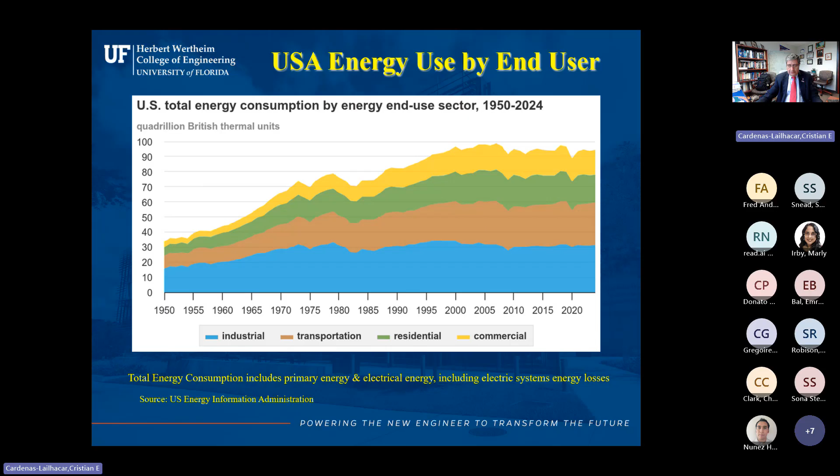So in terms of percentage, in terms of quadrillion British thermal units. So that is in the period from 1950 to 2024. So you see that we're going up. Not much in the industrial, but on the rest, yes, we are. So energy consumption here is considered to be the electrical systems and some process. And all the information I'll show you, or most of it, is from the Energy Information Administration.

So here we have the sources in terms of fuel, sources to generate power. For example, where is it that they go or generate some electricity and power, for example, the transportation. So all the sources of fuel that we have go to the same 4 sectors: transportation, industry, residential and commercial. So in a way, if we group them, they are kind of a 3/3. So the US can be represented as a 3/3, except for the fact that we have a good chunk of energy consumption by the electric power sector. So that is of the essence.

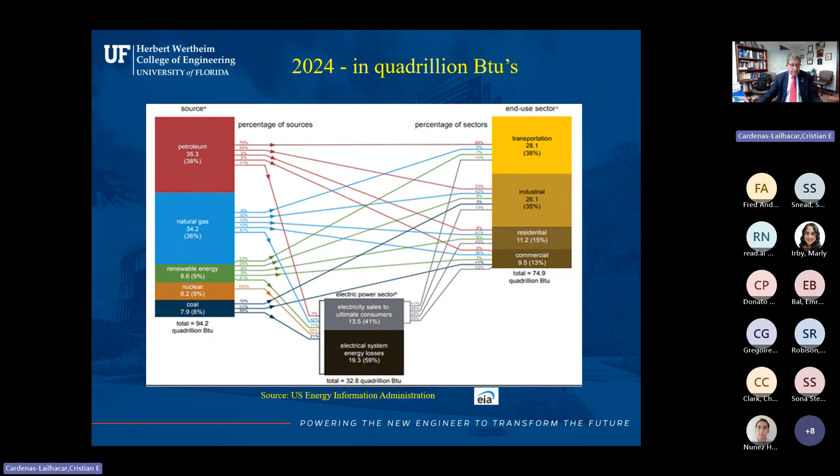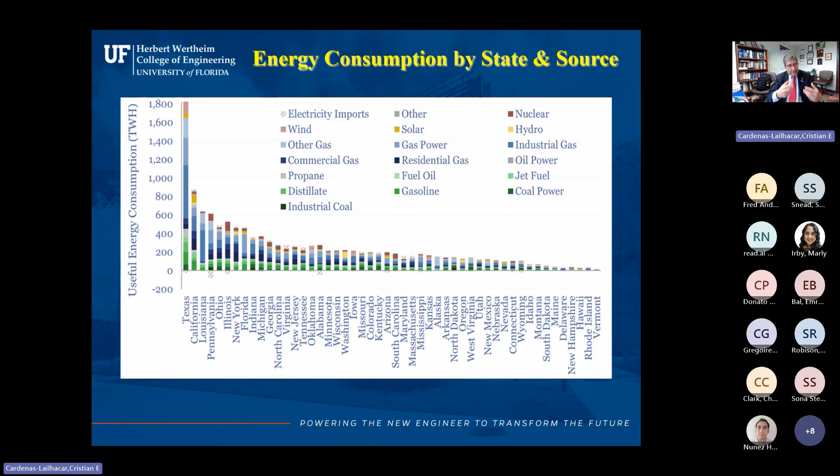Now, how is this distributed around the country? Well, here in this graph, just looking at the states on the horizontal axis, you see that the one that uses the most energy in terawatt hours is the state of Texas. The state of Florida is kind of in the middle down, but we still use a lot of energy. And these sources that are being used are shown on the top. It might be a little bit hard for you to see, but what is the relation between the energy usage and this idea of development? What I mentioned before, energy is in a way a metric for development.

So they are coupled. The goal for OECD countries is that these two are decoupled. Essentially, we should continue growing with a better GDP and keep the energy usage pretty much constant. So do more with less or with the same. And that's the main idea. Now, very nicely said, but there are some issues. For example, you might have some problems if you don't expand your energy consumption.

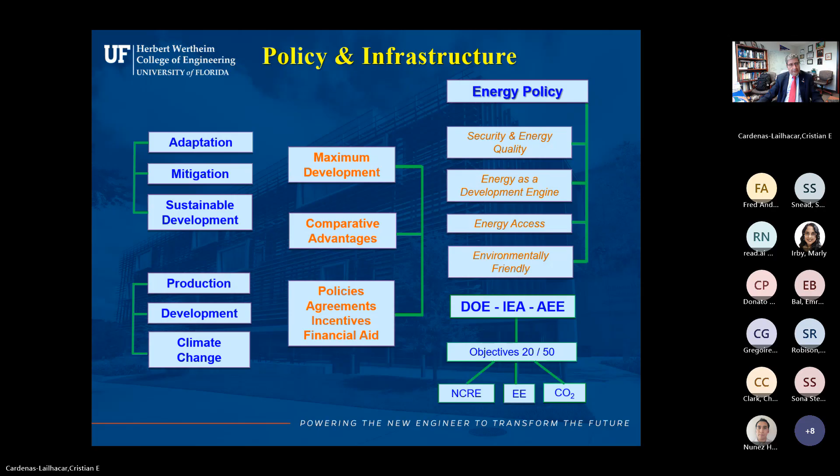Now, what about industry? Well, in industrial energy management, the goal is: if you can do some research and apply it to your company, to your state, to your situation, then if you're going to be generating policy or being responsible for policy, it allows you to be more competitive.

And that's the goal. Competitive, because if you can reduce your production costs—those reductions, which in general are fixed costs, now translated into variable costs—you translate those variable cost reductions to reduce your cost of manufacturing, and then pass those savings to your customers, providing the same goods and the same quality of goods at a lower price.

You are more competitive than those that don't do that, and consequently it's good to increase all that through innovation. In industry, there is no energy regulation. There is in the environment on how much you can emit, EPA knows very well about that, but we don't in industry in terms of energy. So it is important that in industry we consider energy management systems. Why? Because we can save a lot of money, be more competitive, have better trade in the market for your products, provide better services, be more competitive, and increase your sales.

All these under an environmental impact, social responsibility, ISOs allow you to be certified, and if you want to put your products somewhere in the world, Europe, Asia, they will require certifications that are international, like the ISOs. ISO 50001 is the certification for energy management. Then you become more sustainable. So all these are good things that we should be doing and implementing, and they are essentially based on the same ideas.

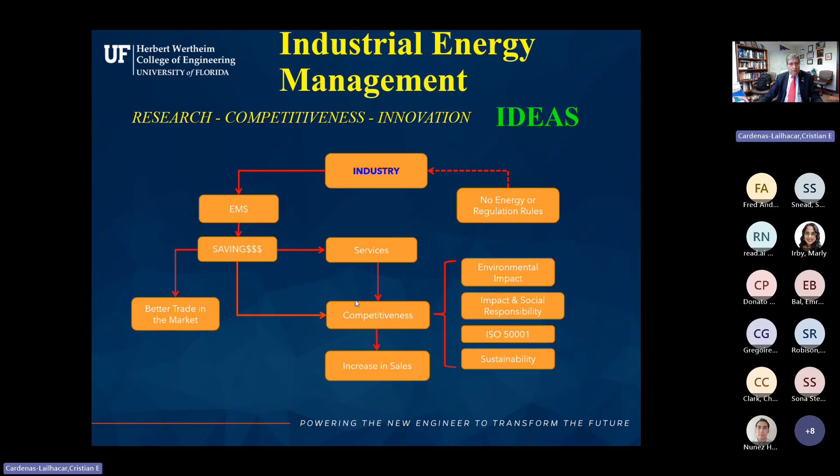Now let's narrow down our analysis to how energy is being used. If we look at the state of Florida, with a total of about 220.7 terawatt hours of energy a year, these are in industry the main energy users: motors and pumps about 50%, as always, air conditioning and chillers 15%, lighting 10%, air compressors about 15%, and then the others. But what is interesting is that motors are 50% of the energy use in industry.

So if we come up with a policy on reducing the energy of motors and pumps by say 10%, then we are reducing the energy consumed by the state of Florida by 5%. Consequently, the effect that a policy will have on those particular targeted pieces of equipment, and particular type of industry, or all the industry, are great.

They are very powerful. Now how do we do all this? Well, you first have to establish some energy goals. What are those goals? You determine. Some companies will say every year for the next 5 years we will reduce our energy consumption by 2-3%, and that's perfectly fine, that's a goal. Or we will get certified ISO 50001 - perfectly fine, another decision. But to get to those energy goals, there's a ladder to climb, shown by this arrow.

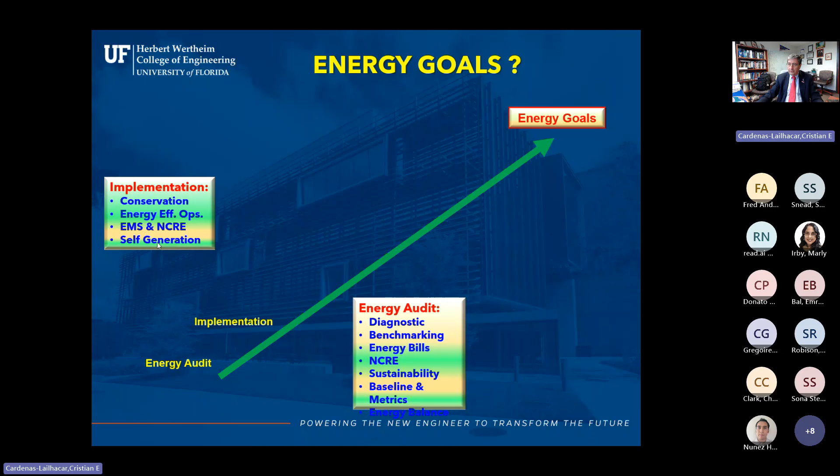After that is the implementation. Now you have to implement the ideas from the diagnostic. So you consider the energy efficiency of the operation, energy management system, and again non-conventional renewable energy sources, and self-generation opportunities like photovoltaics, thermal energy storage, cogeneration, etc., to name a couple.

Then you have to go for measurement and verification. Why? Because you need to know if what was implemented is really saving the energy that they say it would save, and get some metrics. What about greenhouse gas emissions reduction? Do you have any possibilities for carbon bonds? We'll talk about that in a minute. And what are the economic variables that you are to consider? Also we'll discuss that. Are there any regulations - that is in the case of emissions, not in the case of energy? And what are the trade effects? Do you have some opportunities in there?

Well, as you do all that, and in manufacturing in particular, industry, you have to train your team - the workers that are in the production line - so they can take decisions and make decisions as the process goes on, avoiding the fact that many of them have to wait for the plant engineer of that shift to say yes you can do this, or no don't do it. They have to be trained to do that. That saves you not only time, but resources.

And then it will conform for you an energy team. You have to have an energy team. Why do you have to have an energy team? To make those policies that will help you achieve those goals, to provide incentives, training, energy efficiency team, and energy goals. These have social implications and a commitment. And these are the things that we should be doing in industry. And then guess what?

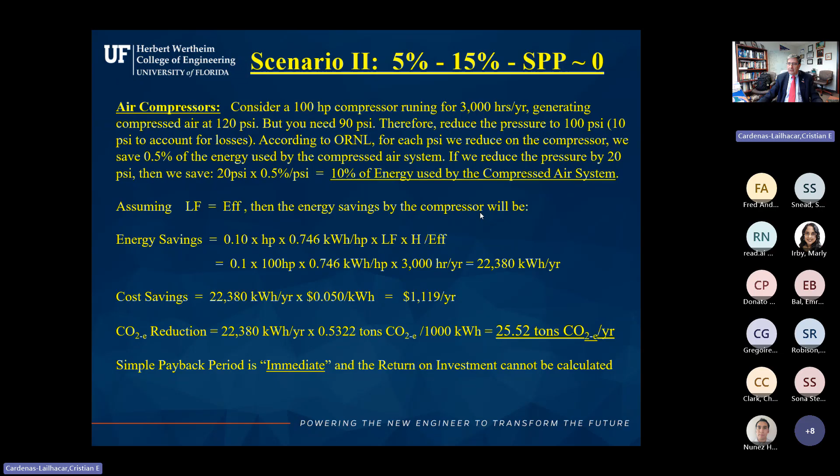How much cost does that imply? Exactly, for those of you who say zero, yes, it's zero. So zero divided by any number is still zero. That's an example of simple payback in the first case, which means 10% savings with very minor costs. I have other examples later on if I can show you.

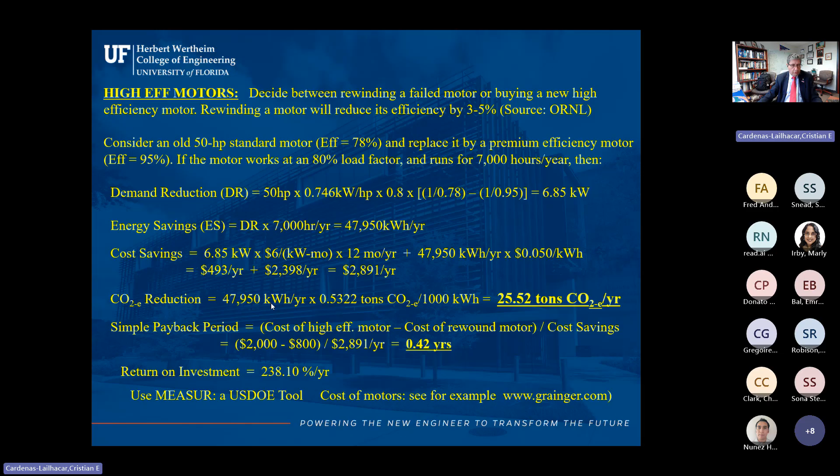What about the environment, the HVAC possibilities? In many facilities like this, it's pretty hot.

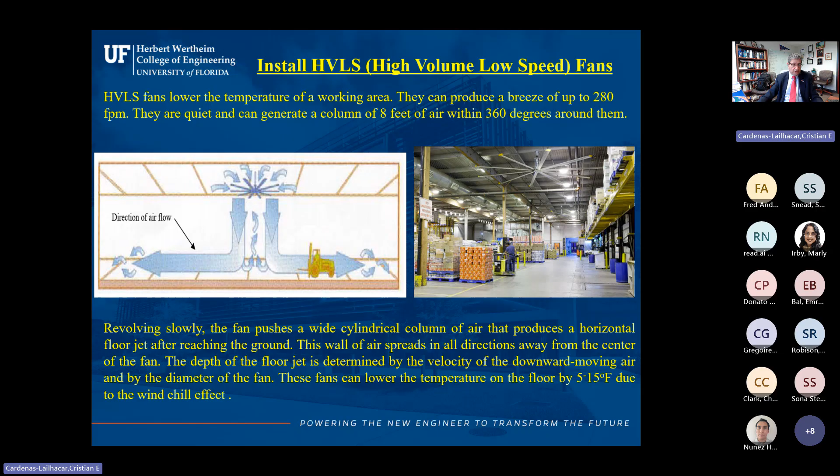Some ventilation is installed here, but for cooling, these big fans that are called high volume, low speed fans, or HVLS fans, provide a column, as it shows in this figure here, a column by rotating of about 8 feet tall, and they do it in a kind of horizontal way, so it's 360. That provides a reduction in temperature on the floor of between 5 and 15 degrees Fahrenheit, so it's pretty good.

So what are the savings here? Well, the savings are that if you reduce the temperature in the plant, the literature says that your productivity in plants can increase about 2% for every degree Fahrenheit. So it decreases, but then you can take it as you increase it. So the cost savings are going to be the productivity increase minus the energy usage by the HVLS that you use.

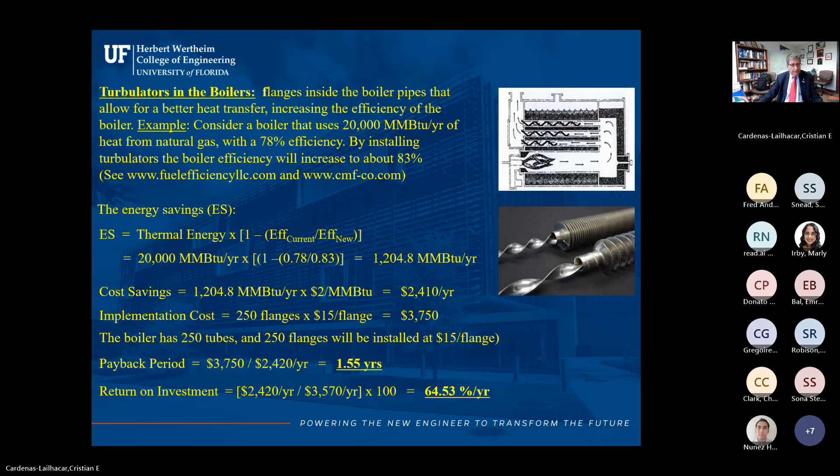Now, let's jump into the fourth scenario, which means bigger investment. And please consider that there are about 120, 150 of these recommendations that appear constantly in industry for energy savings and buildings, etc. So I know we're going to go for a few, but they all fall into these categories, scenarios that I have shown you.

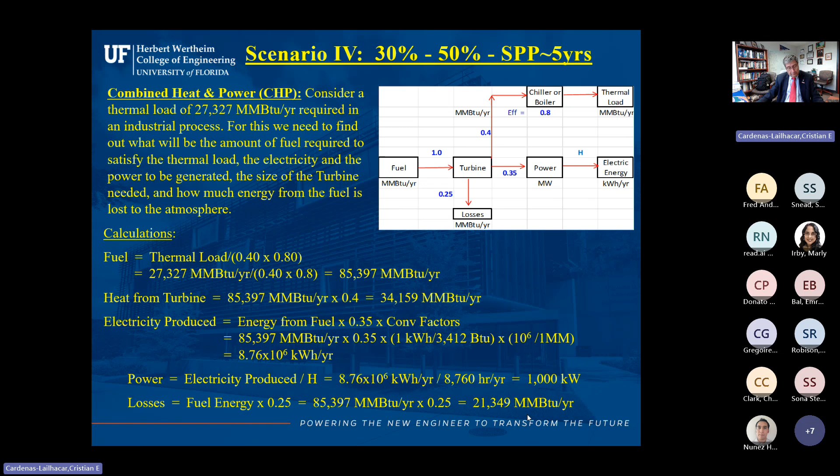Here you go, you divide it by the thermal load to be satisfied, you get your fuel. From the fuel, you can calculate the amount that is needed and used by the turbine to produce electricity. And from there, you go back and divide it by the electricity, and you get that the size of the turbine is 1 megawatt. You have some losses because you have the fuel, you multiply by a quarter of that, 0.25, and you get the losses.

So summarizing, we have fuel injected to a turbine, you have some losses, but then you generate power by using a generator, 1 megawatt in this particular case. And if you run it 8760 hours, all year long, which is recommendable so you don't lose money, you get 8,760,000 kWh a year to be used. And this is conservative because nowadays this can be 40%, and on the exhaust it's about 45%, and the losses are between 10 and 15%. So let's say about 12%.

Then we connect this heat, that is this energy that is coming from the fuel, as heat flow. This is a heat flow diagram. You put it into a boiler, heat water, provide steam, and satisfy the thermal load that initially we wanted to satisfy. So that is what we have calculated as energy savings. We have calculated the needed power in order to generate or satisfy that thermal load. Or conversely, by satisfying this thermal load, what size of turbine do I need to do it?

So cogeneration has all those beauties, and there's the combined cycle of the gas, this is gas, but also the vapor. Beautiful technology. It has a lot of potential, and it always has.

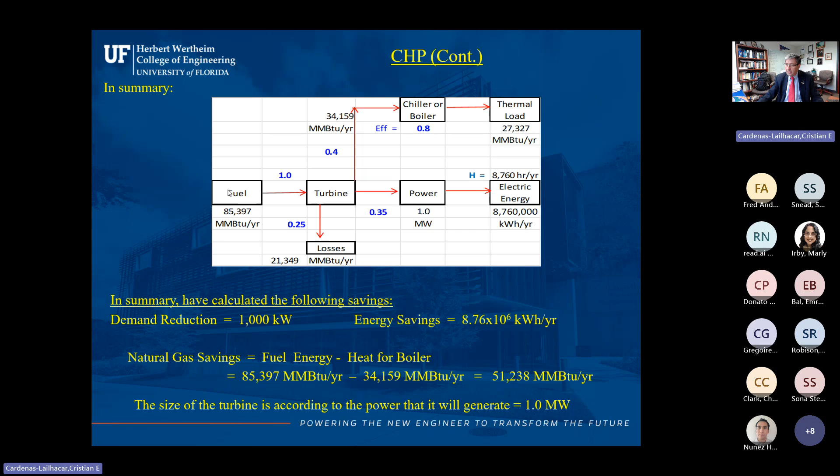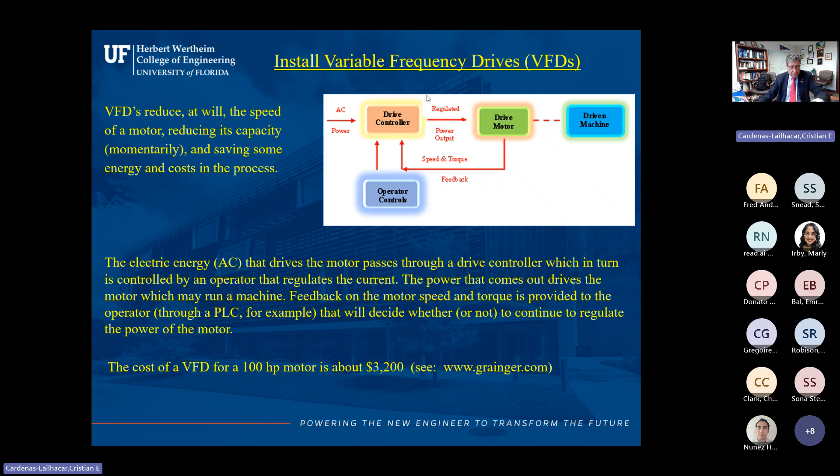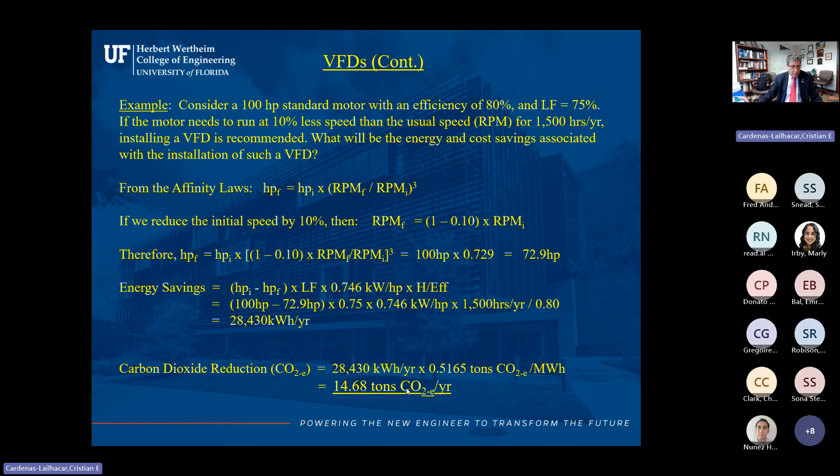Another opportunity in the same range is the installation of variable frequency drives. So I'm going to skip this real quick, just to show you that yes, they exist, and the calculations are there. You can save money. The amount of CO2 that you can avoid or save is interesting, 14.68, and the payback is still 2.17.

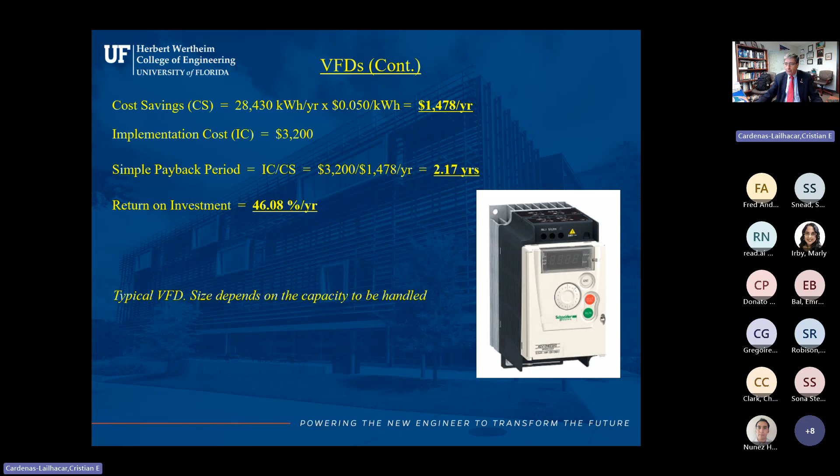So these are the units that you can install in your facility, and variable frequency drives would allow you to save. The utility company will see the peak when you turn on the equipment; the peak goes up and then stabilizes to work the equipment. Then you avoid that peak and the equipment will come up to working regime real fast, but real easily, and the utility company will not charge you for the extra that you used.

In the thermal area, for example, consider heat recovery for a boiler. If you allow me the picture, please. If you have a boiler here and you're injecting fuel as well as air, the air that is usually injected into the burning chamber of the boiler is at ambient temperature with the corresponding humidity.

What we propose, or what we do, is to say we're going to put in this stack over here that has a higher temperature, sometimes 300 degrees, 318, as you see here in the bottom picture, taken with an infrared camera. We put a concentric cylinder, which is a heat exchanger, and by forcing the air to be sucked in, going in a counterflow fashion from how the heat goes out, the cold air gets warmed up and is put into the flame, saving energy.

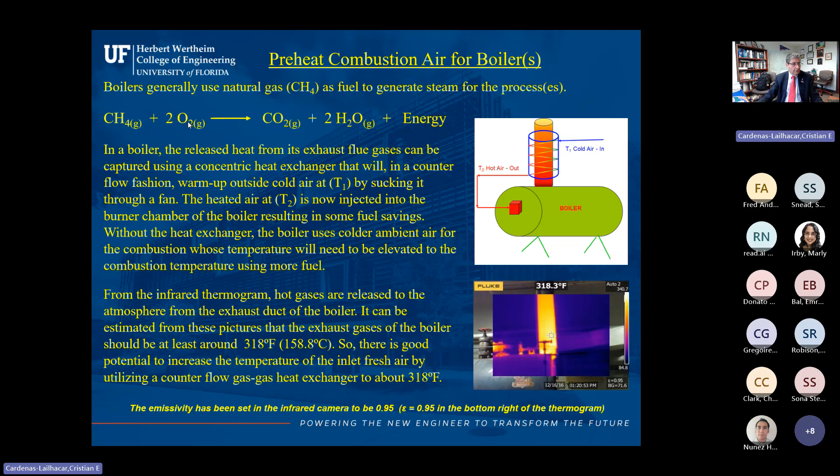How? The combustion of the fuel, represented by this methane, which is the natural gas: we put oxygen and then generate CO2 plus water plus energy. Well, this air represented by oxygen here needs to go to temperature. And the only way to do that is through energy. Who puts the energy? The fuel. Consequently, you're saving fuel.

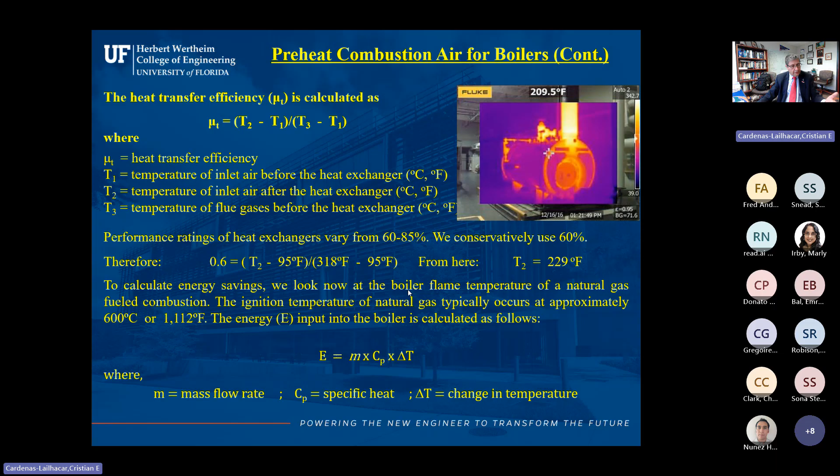And here are some details of the same. I don't want to distract you with the equations, but here they are. It depends essentially on the heat transfer efficiency of the system that we install. Let me just run over this real quick, but show you a summary of what we have done. Here are the ideas that I presented to you. Again, some only. The potential savings, implementation cost, the simple payback, return on investment, energy savings in kilowatt hours, and in italics MMBTUs, demand savings, and CO2 reduction.

We have organized them in Pareto style, with the most savings on the top, and then you go down. But please note the average of the payback, which is pretty high, but it's not that bad. It's because there is a lot of energy and cost included in there. But we are saving some energy.

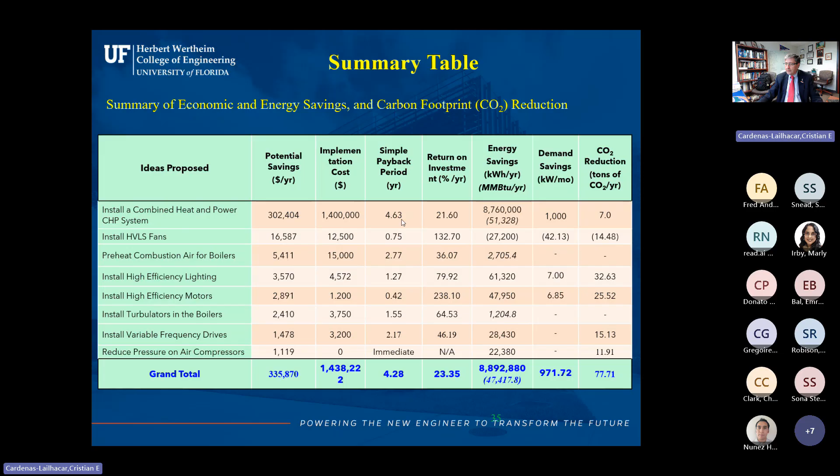Now, notice that in this particular case, because of the cogen, we are assuming that you're going to buy new gas. So we are not considering that you are already using a boiler. So then you have to buy some gas. Still, the payback is 4.63. So it's not the optimal case scenario, but it's there.

Now I would like to show you some ideas that go to the use of some new optimization ways for industry: AI and machine learning. AI is a way of machine learning, if you want, but AI and machine learning can learn how to solve problems. They can learn how to make decisions. So AI will enable our computers to do things that typically require some human intelligence by themselves. I say this because we are going to talk about net zero in a few minutes.

So let me show you this little video here. This is an AI for a driving car lesson. We have some neural network, and these are cars that have some generations, and they are learning how to drive, and they have some variables represented here by these lines that are changing. The reason for doing that is that they learn that this variable makes me hit the wall. I don't want to hit the wall. I need to learn how to go around the circuit and complete it.

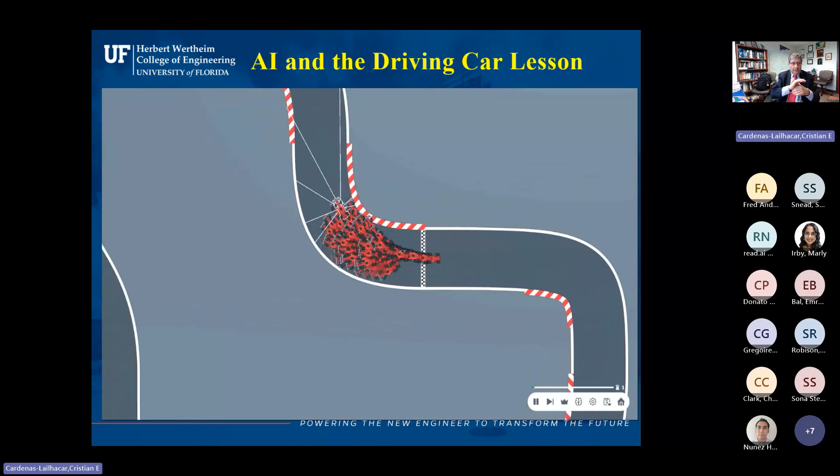And I can do that from the first generation, then the second generation, etc. So it's a genetic algorithm, if you want. Now, they finally learn, and all the generations that come behind, the sons, let me put it that way, learn how to do it as well. And the goal is to see who are the first 10 to cross the finish line completely in one cycle. So here is what you see now in more detail from the whole system.

Now, note that the reason for me to show you this is that because of this, we can use these genetic algorithms to optimize the energy being used in a manufacturing facility. So baseline, equipment list, and energy balance, those are the ideas that we want to pursue here.

So after they have learned here, we can show, for example, how much it is that they learn and how they learn and how much it took them to learn this process. And here is that detail. The generations, which are 20, how much it took them to train, how many frames you have, how many active cars, what was the best distance, what was the time, what's the mutation, the population, 400 cars, for example.

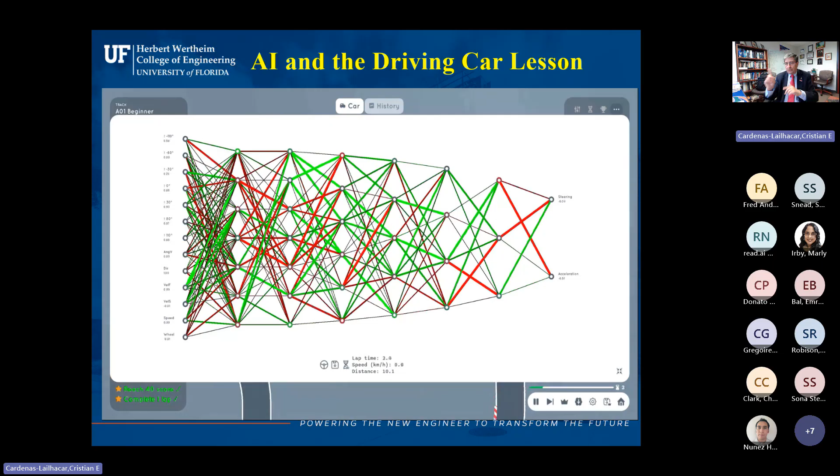But after that, let me now show you what is the neural network. Here are the variables, the same lines that you saw from the car, that are changing in time as they change the weight that they have, in order to steer and to accelerate, in order to complete the circuit. So here is how the network is moving, and they are hidden layers, but you can see how they change, making the decision in order to achieve the goal, which is to cross the finish line at the end.

Now, AI into industry, let me just show it to you, IoT into SCADA in wastewater treatment plants. And for that sake, in any chemical plant, they have these systems where they collect data. The data is coming to the facility, to the plant, and they have this recording where the operators can change variables and find out what in the world is going on with whatever systems they are controlling. So they can see trends, etc. So it's very interesting.

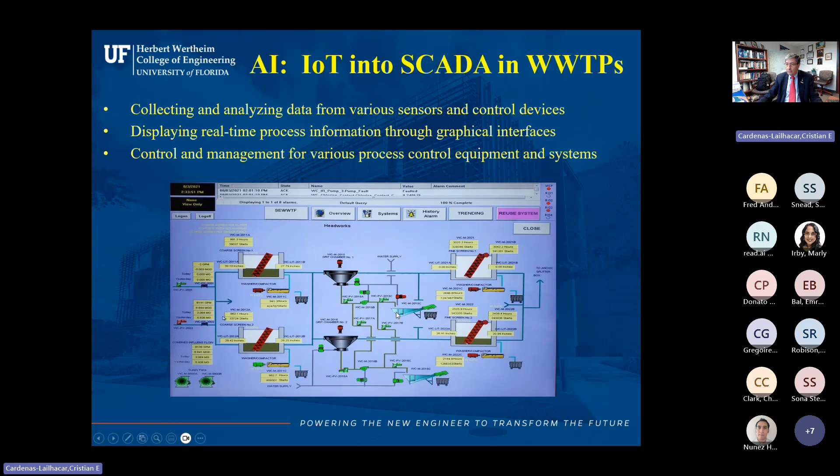So what happens? The equipment readings provide some information to the SCADA, as you saw on the previous screen. Then you design an IoT, which is a software, essentially, that tells, hey, according to your needs, here are the optimum values that you should be using in your process. And it feeds it back to the SCADA system, and the SCADA applies them according to the operator decisions, and you keep on going.

The interesting thing is that with this system, you can have the same information in your smartphone, in your tablets, in your app. So if the plant manager is on vacation anywhere, let's say comes to Disney in Orlando, or goes to Europe with the family, or goes to the Grand Canyon, he can see that and address issues. So SCADA is one of the systems that go to the IoT platform, which is secure, not all the time, but there are some security issues there. But all these ideas come into the possibilities of using web and mobile applications for analyzing your system.

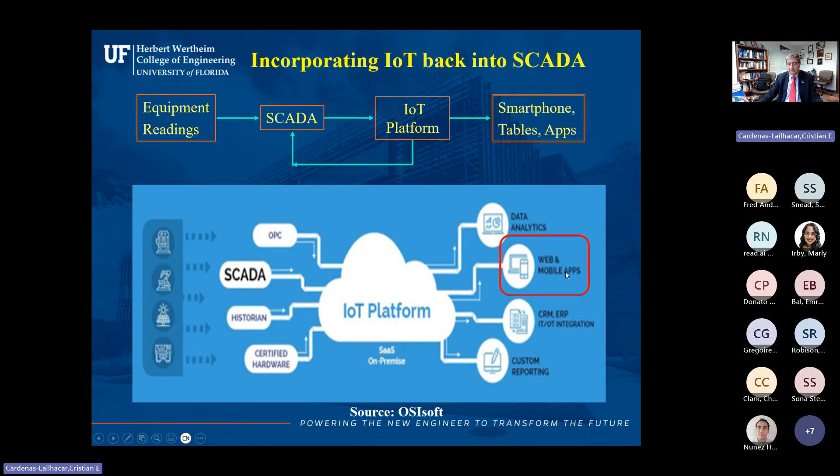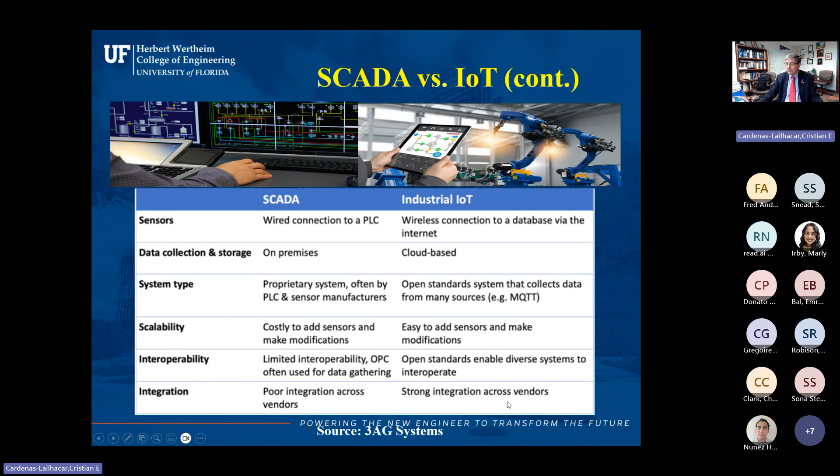Are there differences between SCADA and IoT? Yes. One is wireless, the other one is not. One is on the premises, the other one is cloud-based. There's strong integration in IoT across vendors, so to decide what it is that you want to do. How many recommendations can you consider here? Here are 21 of them, all AR related towards IoT in chemical industries.

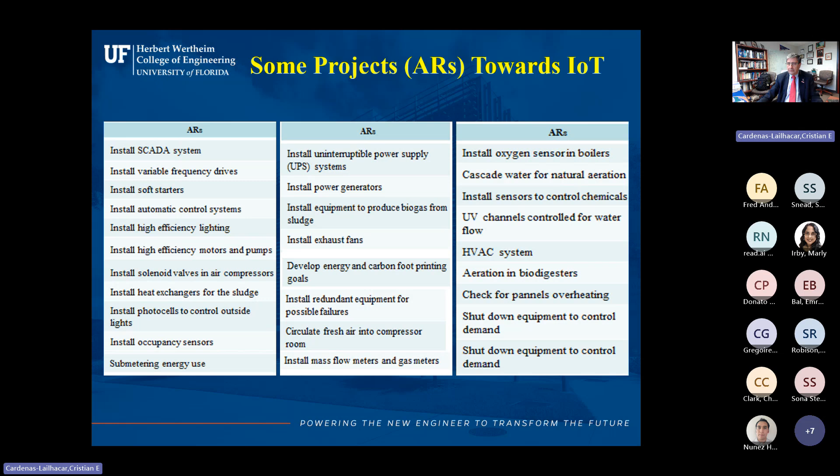Now, notice that in the state of Florida, there's about 4,500 plus wastewater treatment plants. So one of the reasons why this is not better is because some facilities do not treat the biogas generated to transform it into energy.

Now let me go to the idea of the net zero. So one of the main issues with these ideas is that there is no incentive really to make those high paybacks better. So since there is...

Okay, oh well, it doesn't want to show up. Let me see if I can.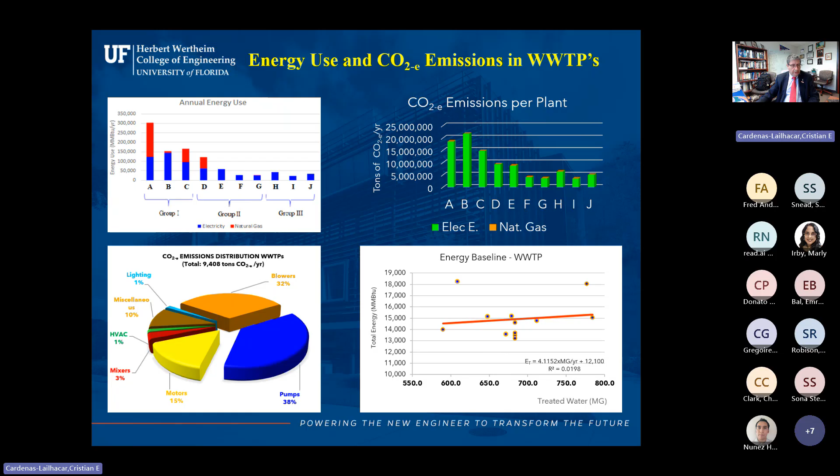In order to see what will be the effect on cost and energy savings and paybacks for carbon credits, since we're talking about carbon credits, how can we make the simple payback smaller, to make it more interesting for the state, for the industry, for the companies? Consider these groups of facilities, and we have some reduction on CO2 and some cost savings. Currently, this is what we have. And this is what we have of implementation cost.

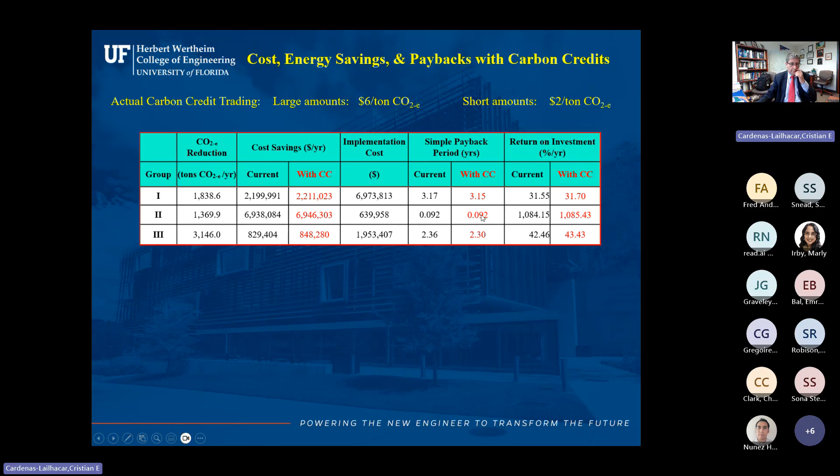The simple payback could be 3.17. If we add the current price of carbon credits, at large amounts $6, small amounts $2, then the new payback goes from 3.17 to 3.15. So essentially, there's no effect. Why should I reduce CO2? No incentive. The same happened with the return on investment. And again, the other cases are the same. So today, adding carbon credits to the cost savings has practically no impact on the bottom line of any company and industry in any state.

For those of you who are as old as I am, you might remember that in 2001, former President George Bush, the son, didn't sign the Kyoto Agreement for a very simple reason: it would jeopardize the local industry. But he created his own agreement here in the United States, and you could see in the papers that you could sell carbon credits inside. Nowadays, the costs are so low that they don't make a dent. When you have this new market, you can sell and buy and have a compliance market and go to cap and trade. But there has to be some regulatory policy for that.

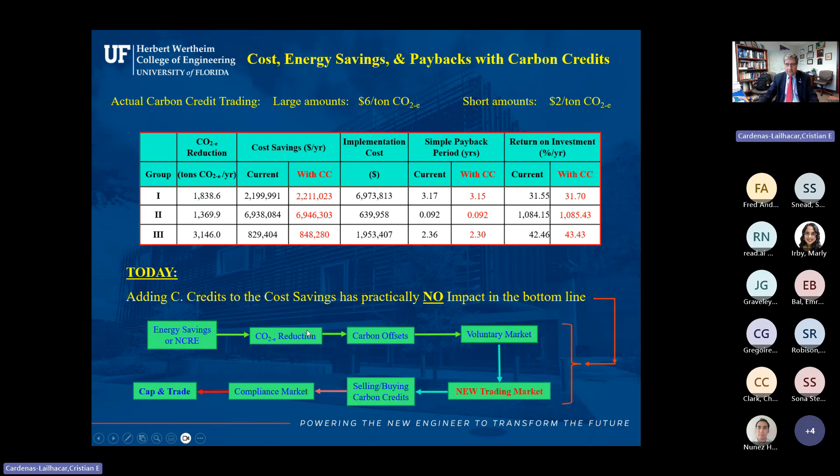Now, not for the sake of punishing. If you are emitting pollution, you have a boiler or a furnace, you have to have EPA allowing you to emit this much. If you pass it, you will get penalized, but you can go less. But instead of penalizing, if you avoid emissions, we should have a kind of rewarding system, and that is the idea that we would like to propose.

So unfortunately, I have to say the market today has some restrictions. One of them is that you have to be certified. Somebody has to certify your emissions. But you can verify it through clean development mechanisms. Projects must reduce emissions, but only for CO2 avoidance. As of today, you have to show that the project is not for energy efficiency, productivity increase, etc. How come? So you can't apply. The project has to be not for profit. Again, how come? Planting fruit trees, for example, is a fantastic idea only if you're not going to profit from the fruit.

I don't know any packaging or fruits company that will agree with that. So there are better chances for clean development mechanism and the idea of using circular economy. Solar panels have zero emissions, good to implement to reduce carbon credits or emissions, but only good if they are 100% sold.

Renewable projects must show additionality, so it's on top of, not instead of, some energy. The reduction of electricity or energy use on CO2 is not the same as emissions reduction. So that is a problem.